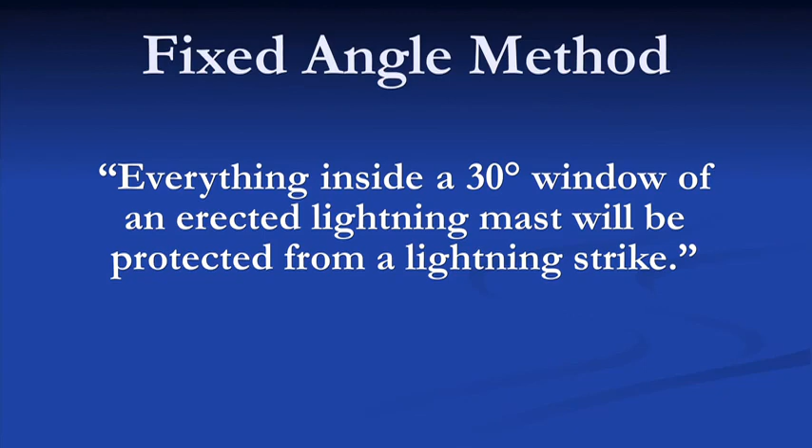So the fixed angle method basically states that you can erect a mast in your substation, and everything inside its 30-degree window will fall inside its protection. So right here you can see we've erected this mast, and the equipment that falls inside this dotted line, inside its 30-degree window, is considered protected.

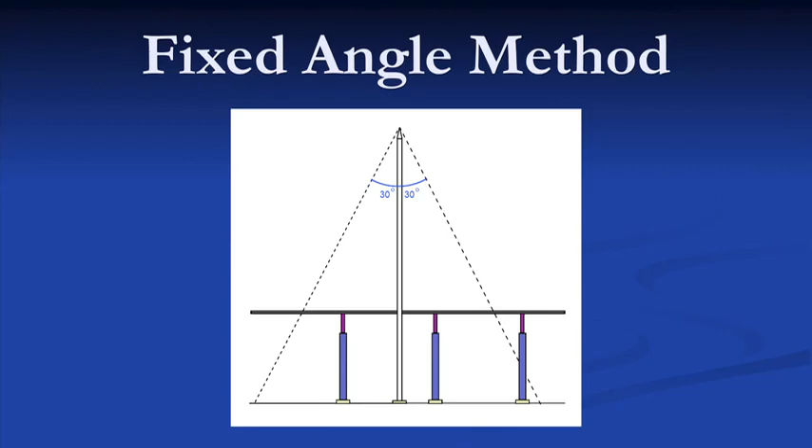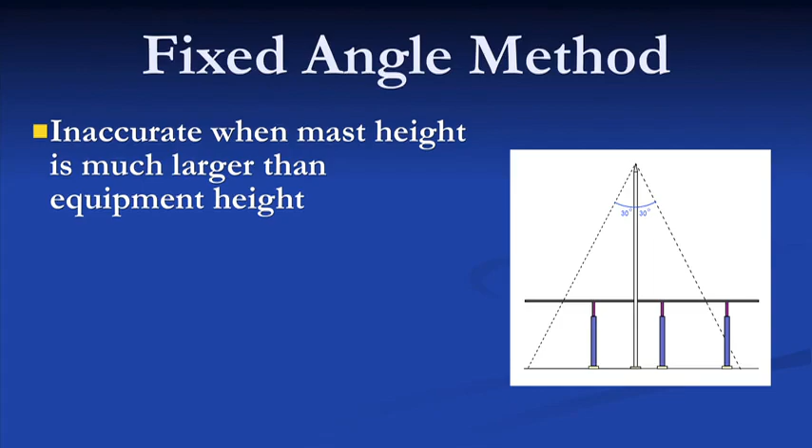Now there's a few shortcomings to this. One is that it doesn't really hold true to very tall situations, to situations where the mast is much taller than the equipment height. For example, the Empire State Building is a very tall structure. However, buildings inside its protection zone, its 30-degree window, have been subject to direct lightning strokes.

Another theory says that, well, if this is accurate, then the simplest solution to protecting your substation would be to just erect a really tall mast in the center of your substation. Even though that may not be economical, it would be the simplest way to protect your substation. And we found out that this isn't true, and items are still subject to direct lightning strokes.

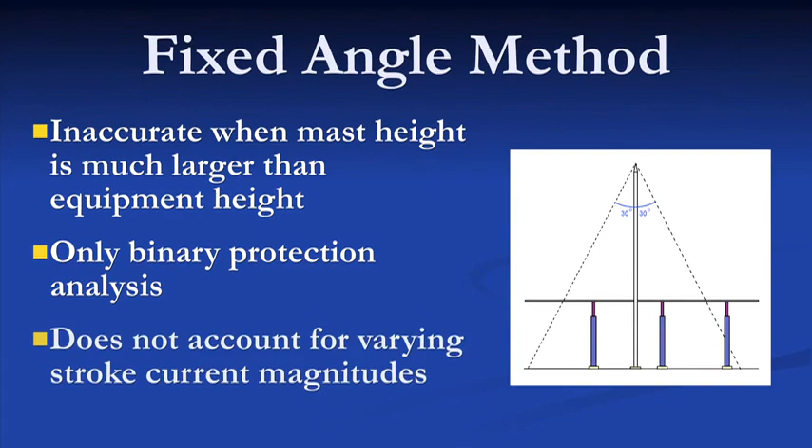Other shortcomings of this method are that it provides only a binary protection analysis. That means either everything is protected or not protected. It doesn't account for varying stroke current magnitudes. So if a stroke current is greater than another stroke current, we can't say, well, it protects against this current, but not against other currents.

The electrogeometrical model was then developed. It was developed in 1971 by the Edison Electric Institute for Transmission Systems. Very shortly thereafter, a gentleman by the name of Ralph Lee simplified it and modified some of the formulas so that it was ideal for substations and buildings. It was then shortly thereafter criticized by Eriksson and Anderson, but then later in the late 70s and even 1980, Mousa and Srivastava worked together and they eliminated a lot of these discrepancies, and that's what we use today, and that's what you'll find in the IEEE 998 Section 5 today.

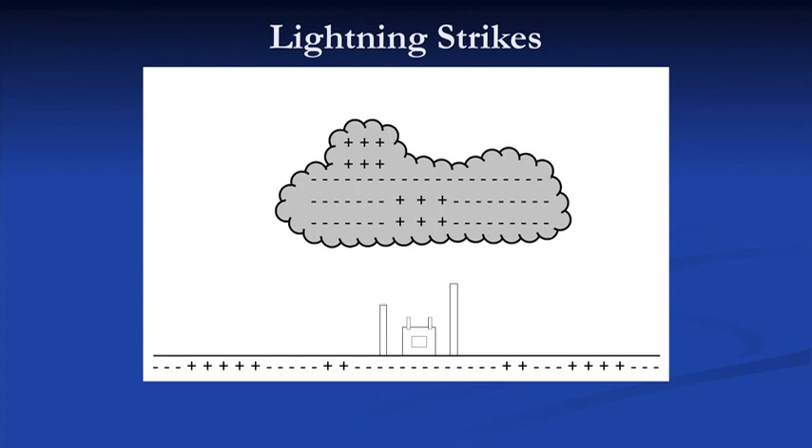All right, so to understand how the rolling sphere method works, we first need to understand a little bit about lightning strikes. And the way lightning strikes work, first you start off with a thundercloud. Now a thundercloud is a cloud where a charge separation has occurred. This charged thundercloud will then ionize the air around the cloud, forming these little step leaders, and they're formed in random fashion. Well, eventually they'll make their way closer to the ground.

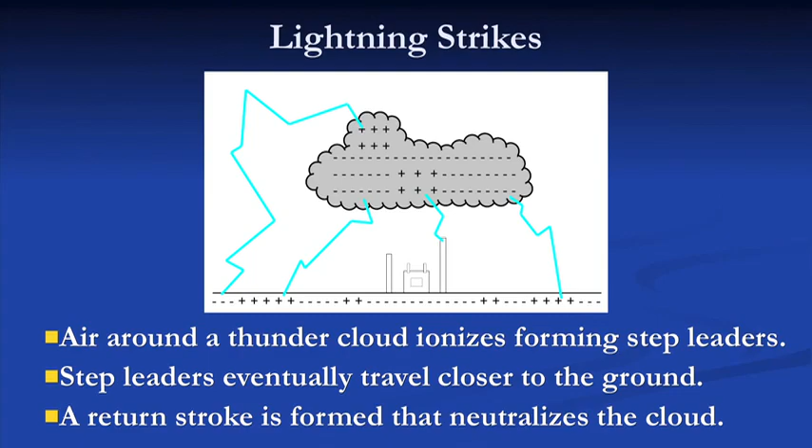When they're within striking distance of something on the ground, a return stroke is formed. The return stroke is that bright bolt that you see. It really carries the muscle of your lightning stroke. It has the high current, and it's the one that can be dangerous to your substation. It goes from the ground, either through an object or through air, going back the path of the step leaders, back into the cloud, and then neutralizes that cloud.

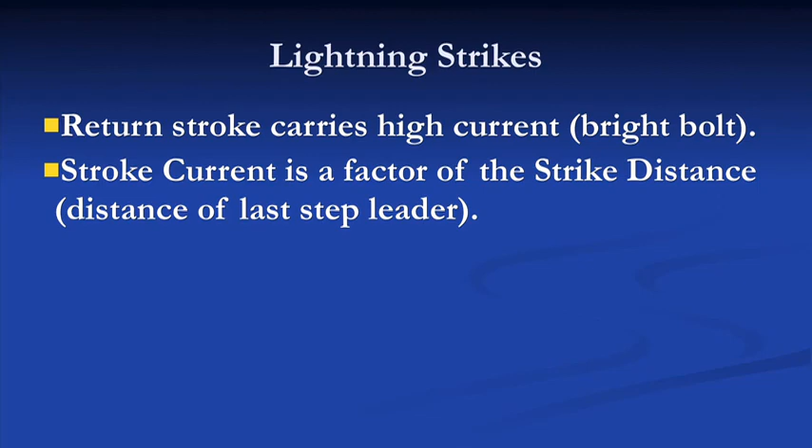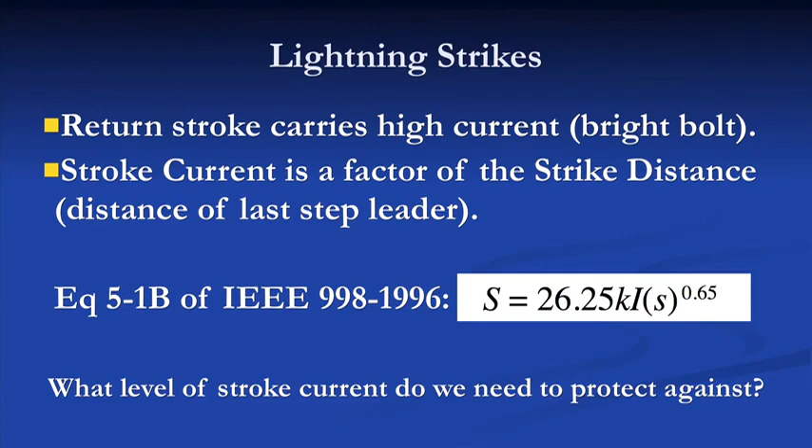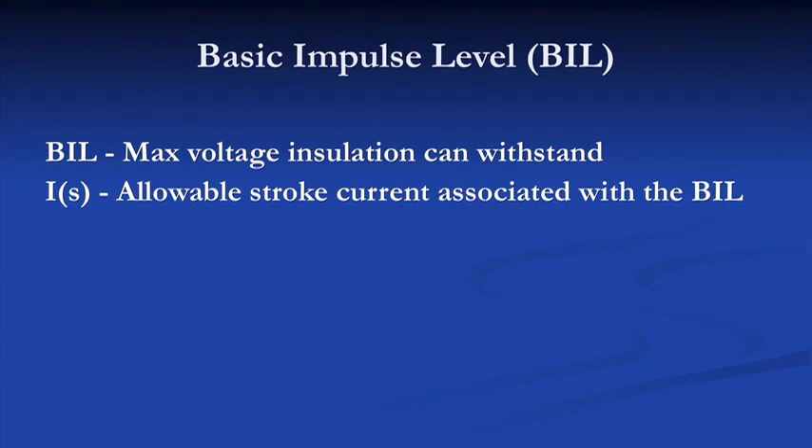That's given to us from our basic impulse level, or BIL, also known as your basic insulation level. Your BIL is the maximum amount of voltage that your insulator can withstand before flashover. IS, the allowable stroke current associated with that BIL, is calculated by the following formulas from IEEE 998. This is the minimum stroke current required to cause flashover.

Well, what about stroke currents that are greater than IS? Don't we care about those as well? If you can protect against IS, you protect against higher stroke currents. Let me explain why.

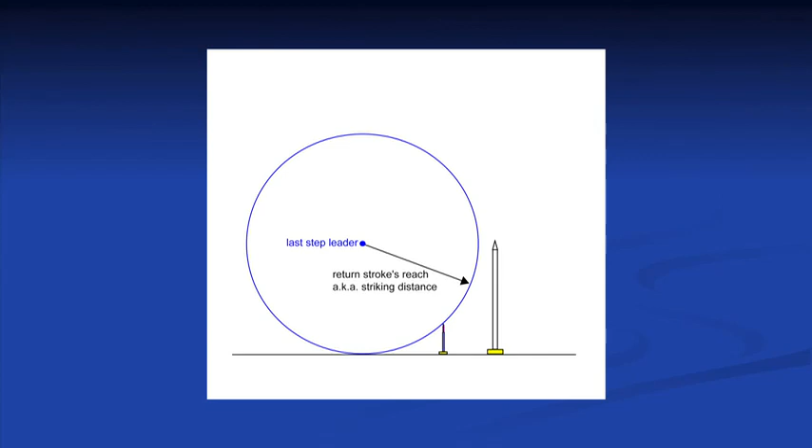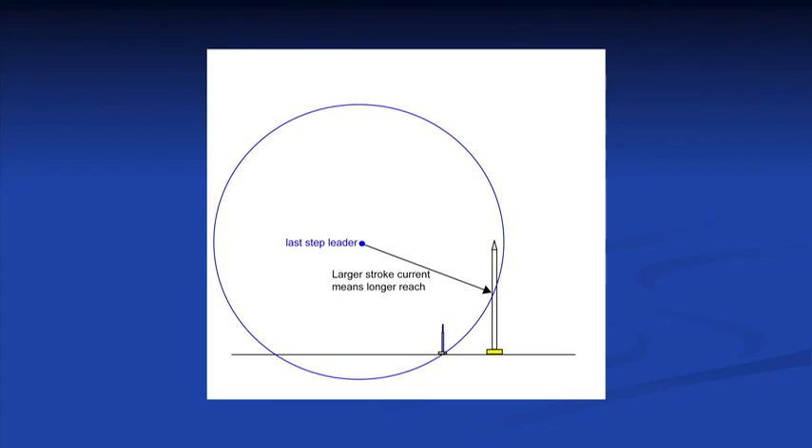The greater your stroke current, from this previous formula, the greater your strike distance is. The greater your strike distance, that means the step leader, the return stroke, has a greater reach. It favors grounding electrodes and shielding masts simply because a shielding mast is very tall, there's less air insulation, there's no insulator to flash over, so there's less resistance back to the cloud. So when it has a choice, it's going to take the grounding electrode or the shielding mast or the shield wire instead of your equipment.

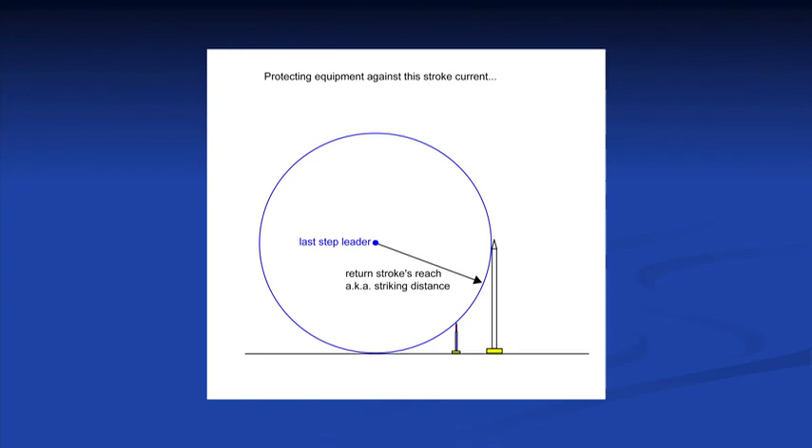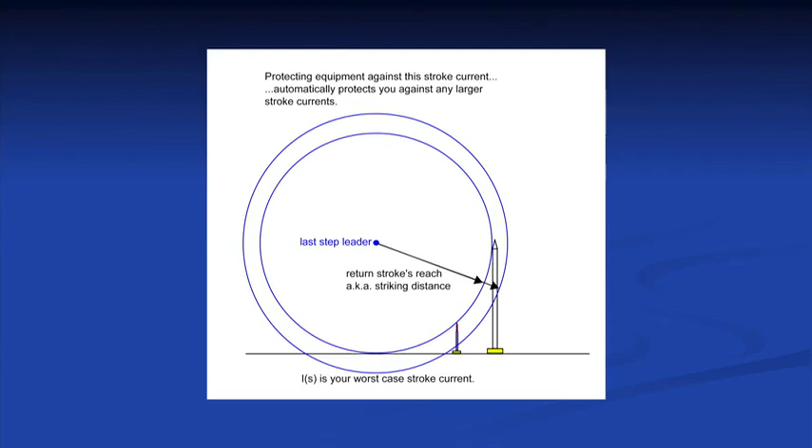So if you can protect against the stroke currents that have the shortest reach, which is the minimum allowed stroke current, then you can protect against the ones that have a longer reach, because the ones with a longer reach will have a much easier time finding that mast or shield wire to travel through.

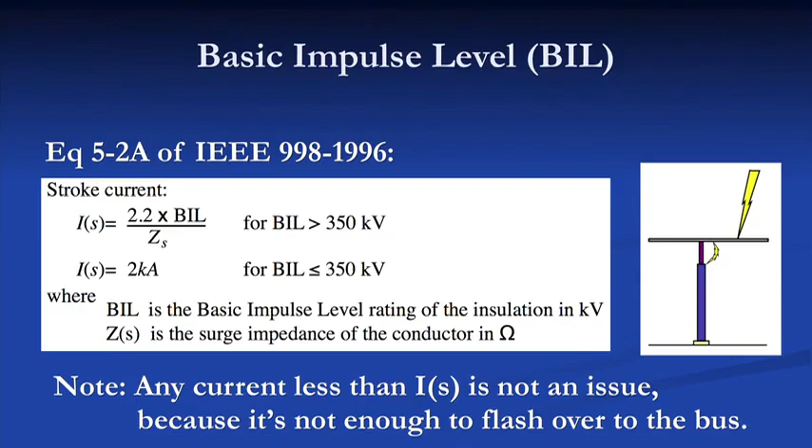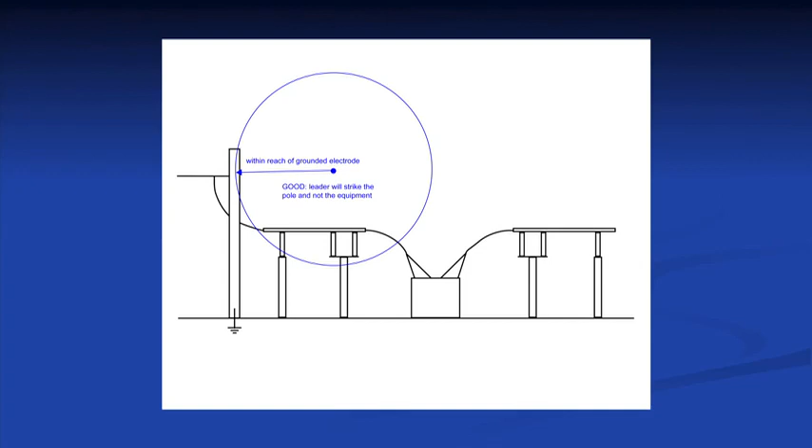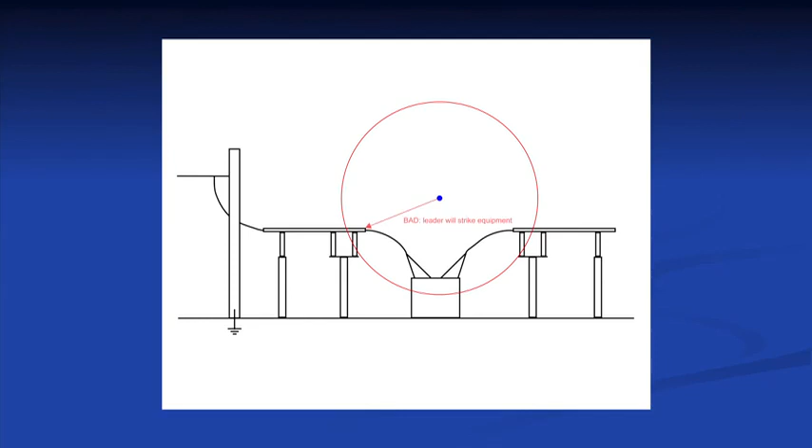So what is the strategy behind the rolling sphere method? A step leader can originate anywhere in a substation, but if it's within striking distance of the ground or a ground electrode, we have nothing to worry about - it's going to take that mast, grounding electrode, or shield wire instead. It's the ones not within reach of a mast that could be a problem, especially if they're not within reach of a mast or the ground, but are within reach of your expensive equipment. So to test a design, we need to see if there's a place where a step leader could form that can't reach a mast but can reach equipment.

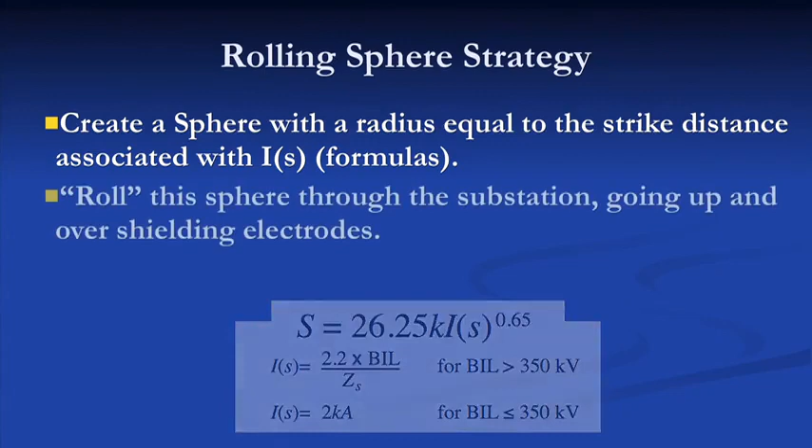So to do that, we create a sphere with a radius equal to the strike distance associated with IS. There are some formulas - we're not going to go too deep into those right here. Then you want to roll your sphere through the substation, going up and over your shielding electrode. Every time you run into a mast, you go up and over it. I'll demonstrate that here.

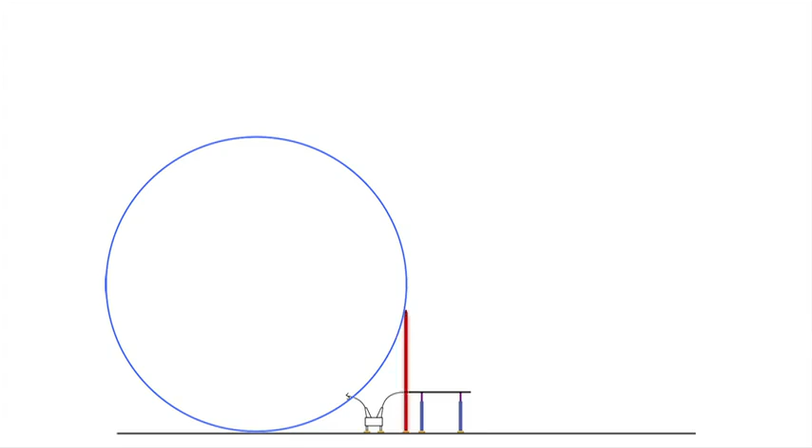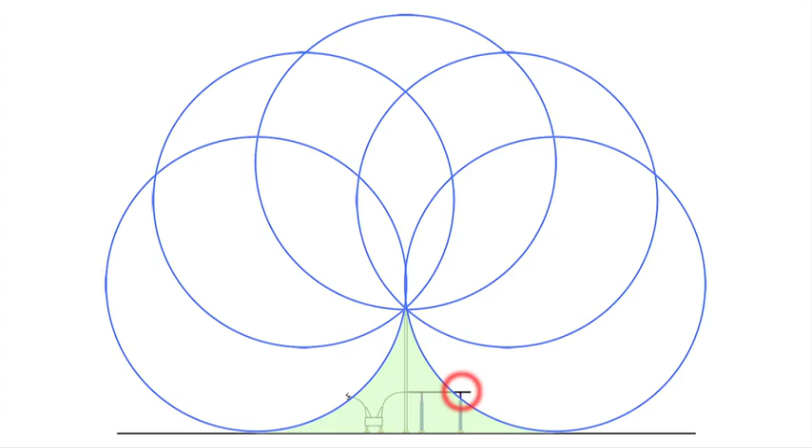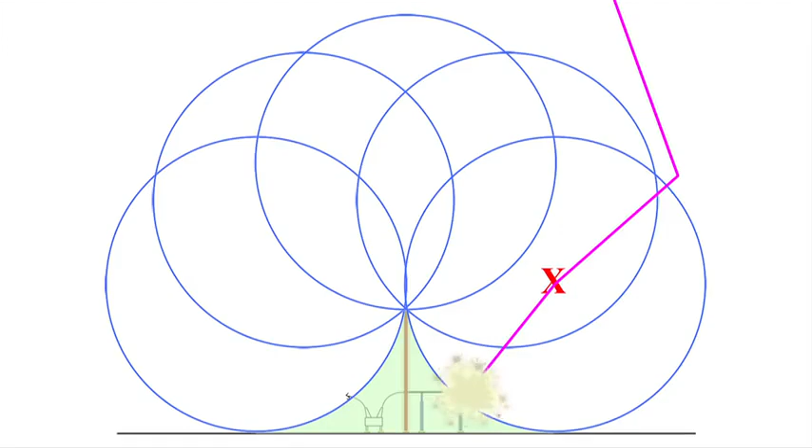This is the center of this sphere. This is where that step leader occurs, where it cannot quite reach the mast, it cannot quite reach the ground, but it can reach this bus. Now that is, again, for that specific stroke current. If our stroke current was any larger, our strike distance and our reach, therefore, becomes larger.

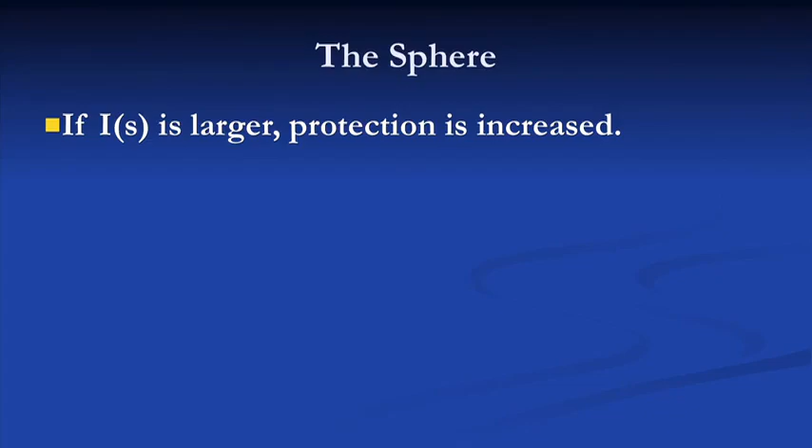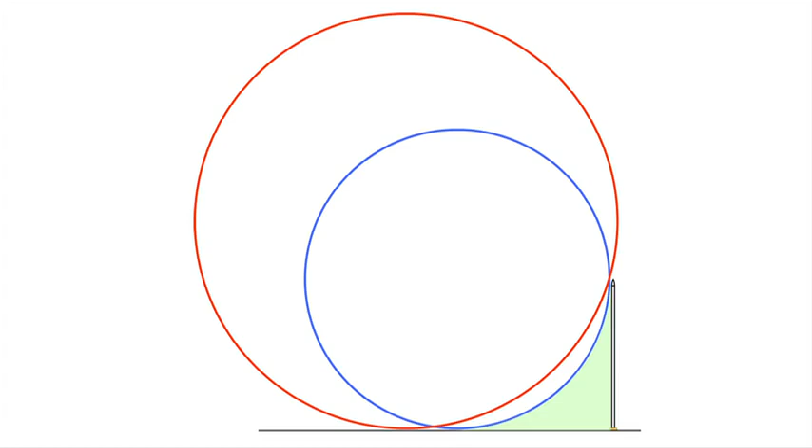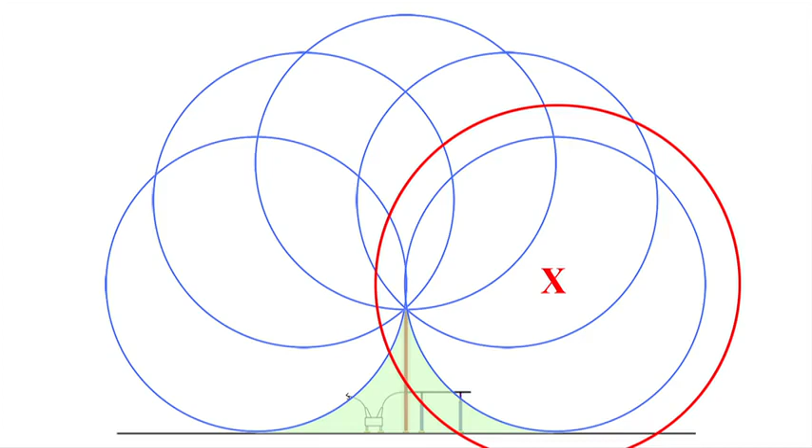Again, with the previous example, if a step leader forms at this X, that has this given stroke current to create this size circle, it could strike this bus. But if the stroke current is, again, just a little bit larger and it forms in the exact same place, you can see now the mast is within reach and the ground is within reach, and so it won't strike the bus. So the only thing that's really dangerous to that bus is stroke currents of a particular magnitude that form at that X. Again, a small window of stroke current.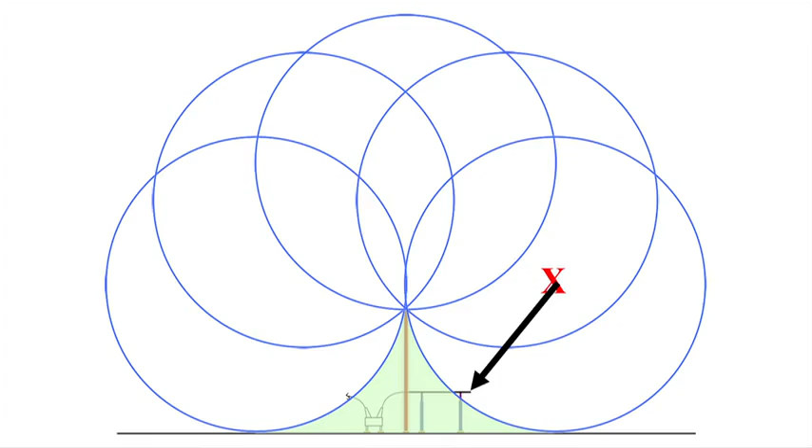So you can see this mast actually does provide protection to this bus, even though from our analysis it's unprotected for that particular stroke current. For greater stroke currents, it does provide protection.

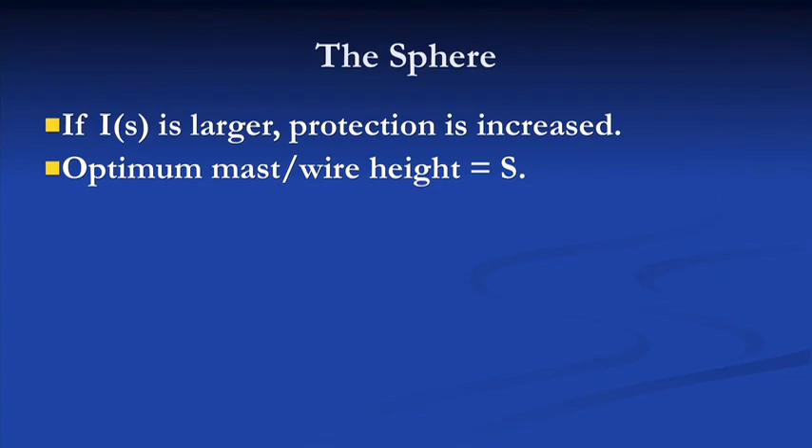You may have noticed that the optimum mast and wire height is equal to S, your strike distance. Well, why is that? Here's an illustration that shows that. When you're rolling your sphere across your substation, the result that gives you the greatest area under your curve would be a mast or a wire that stops the sphere right at this 3 o'clock point. That gives you the greatest area under here. Here in this example is a wire, the wire going through the screen and providing the same protection.

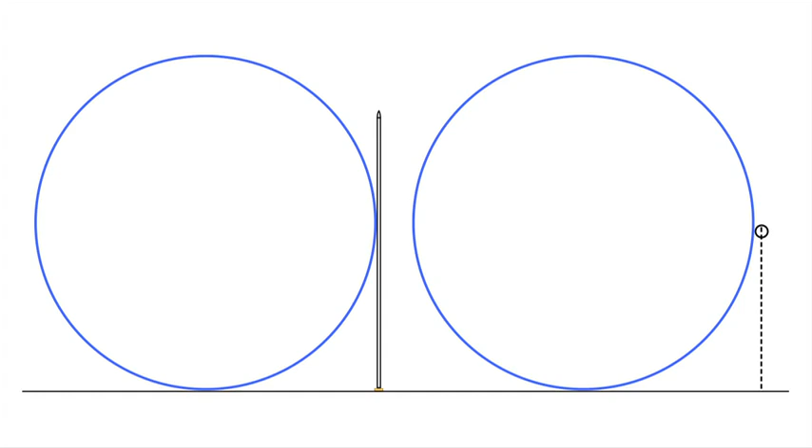Now a mast that's taller than S has no effect. It's not going to increase your protection. It's not going to stop the sphere any shorter or any later. But a wire that is taller than S can actually reduce your protection. Well, why is that? Well, here's the mast that's taller than S, and you can see again the same level of protection provided. But a wire that is taller than S could be a problem.

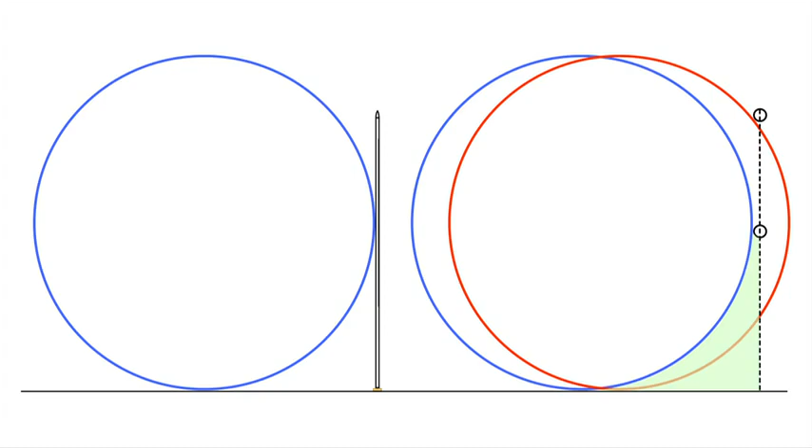If the wire is taller, the sphere can actually begin to roll underneath the wire. As you can see, the protection provided here underneath the red curve is much less than the protection provided underneath the blue curve when your wire is at the height of your strike distance.

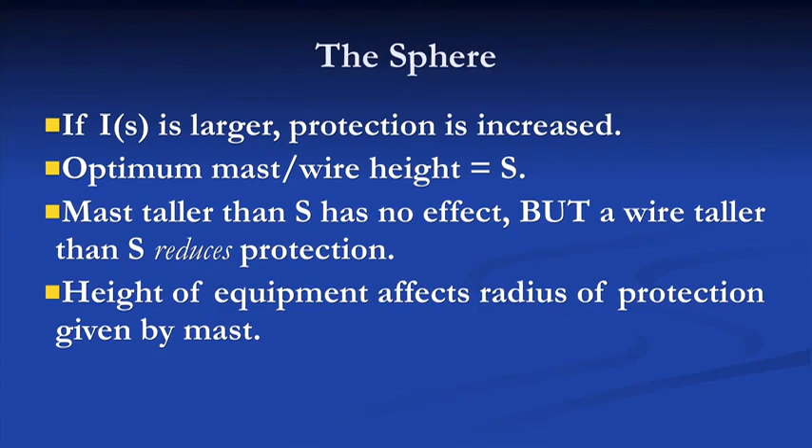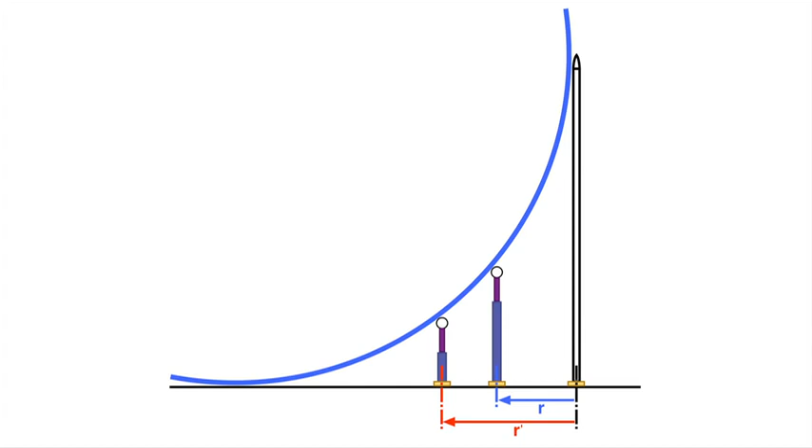The height of your equipment affects the radius of your protection given by your mast or wire. And why is that? This illustration shows that we have two different equipment heights. The shorter equipment you can leave further out from your mast. Now this is a good illustration of radius of protection, is how far out from your mast can you place your equipment. And as you can see, the shorter your equipment is, the further out you can place it before it's subject to direct strokes.

That means when you're calculating your protection radiuses and your geometries, every time you have a change in your BIL, for example, if you have a transformer and you have a high side and a low side, you're going to have two different BILs. Every time you change your BIL, you're going to have to take that into account when you do your calculations. Every time you change your equipment height, you're going to have to take that into account when you do your calculations. And again, every time you change your conductor, it's going to affect your conductor impedance and then affect your strike distance and stroke current.